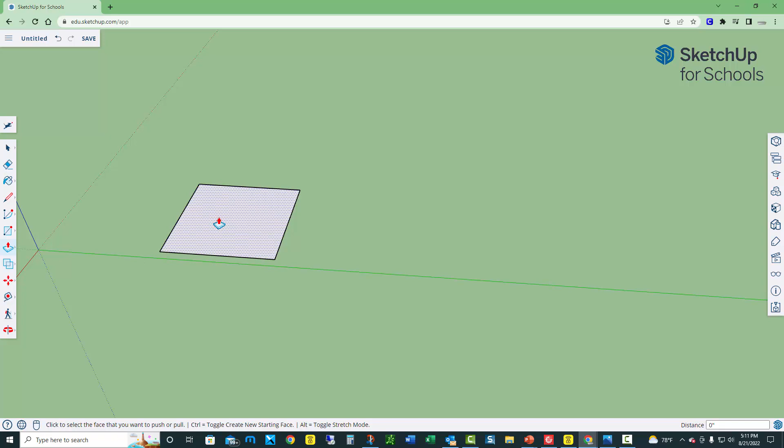So we'll go to the push-pull tool. This is the push-pull tool right here. We'll click on it, select it, and hover over the square. We will first click the square and start raising it up.

While we're raising the square up, if you notice in the bottom right hand corner, it has a distance of 21 1/8 inch. We want to make that 4 inches. To make it 4 inches, you notice it's still highlighted. While it's still highlighted, I would type in 4 on my keyboard,

Shift, and the quotation marks, Enter. That makes my roof 4 inches.

The next step, we would use the line tool to find the midpoint, and then we're going to create a ridge. To do that, we'll go find the line tool. It's over here, it looks like a pencil.

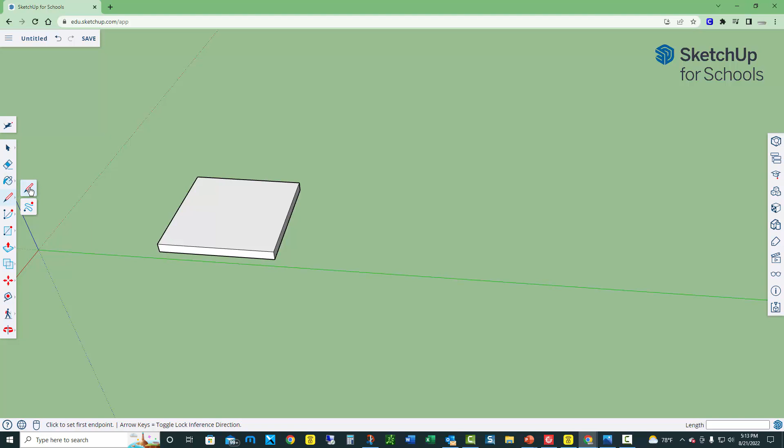The line tool. We'll click on the line tool. Again, it looks like a pencil. We'll click on that one. And now we're going to go to the edge and find the midpoint.

If I'm releasing my mouse now, you see the midpoint. You don't have to release your mouse, but there's the midpoint. Now I'm going to click once and drag up over.

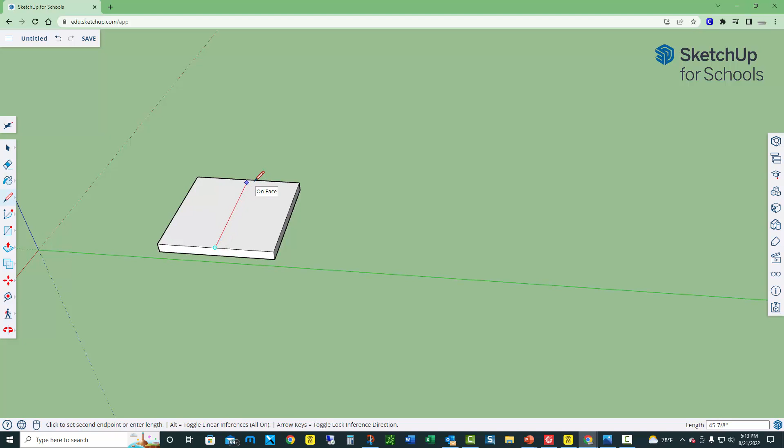And you notice the inference line. I'm looking for the other midpoint. Once I reach the edge and get the other midpoint, I will release my mouse. Now that I have the midpoint, the ridge, that's where the ridge is going to be, top of the ridge.

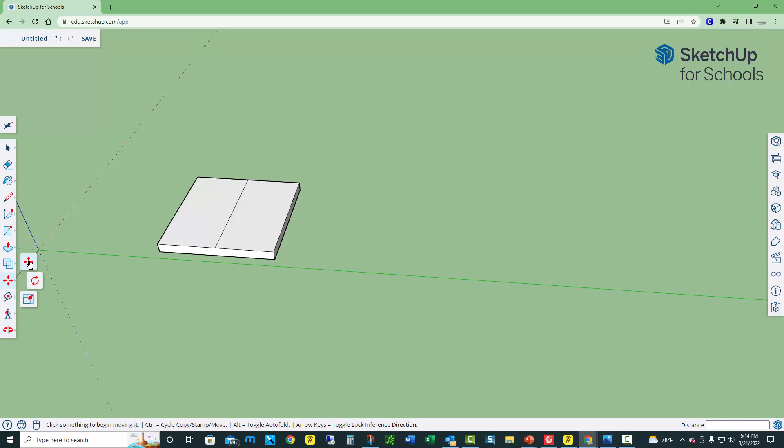Now I will use the move tool. I will click on the move tool. That's the move tool right there. Click it. Now I'm on the edge right there.

Once I'm on the edge, I will raise the roof. Click once to raise it. And if you notice, you see that dotted line, black dotted line. I'm looking for the blue solid line, see, on the blue axis. Once it's on the blue axis, I can let go.

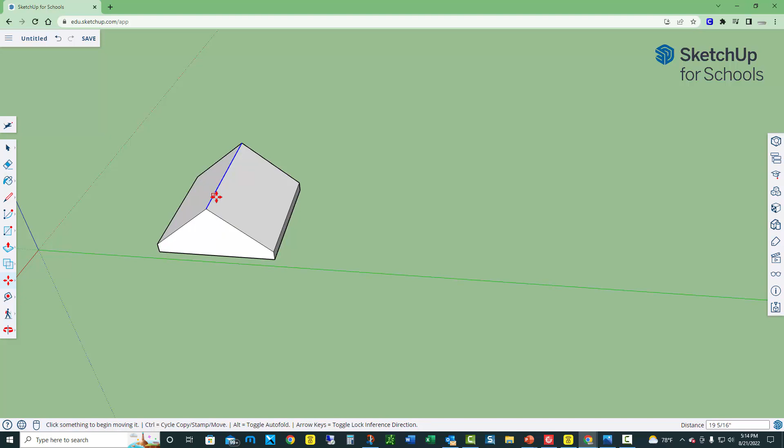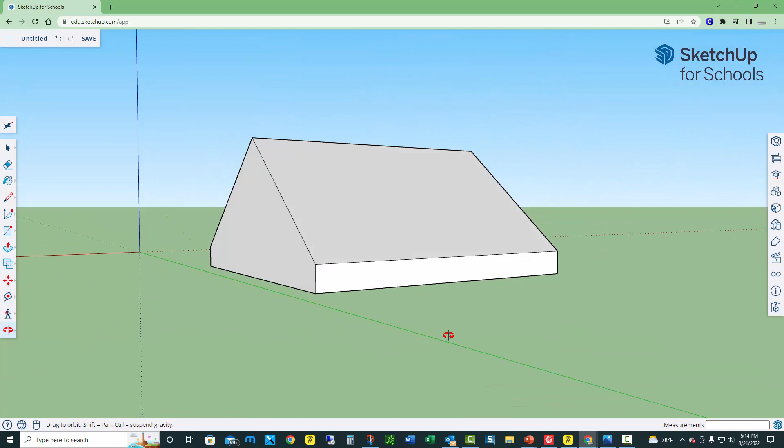So if I rotate it around, it's on the blue axis. But I can also raise this roof 12, 20 inches, depends on what I want. I can pick and choose. But for this project, we will raise it 12 inches.

So I'm going to click Control Z to undo what I just did. So anytime you find that you made a mistake, you can click Control Z, or you can click the undo arrow up there. I will click Control Z. That allows me to start over.

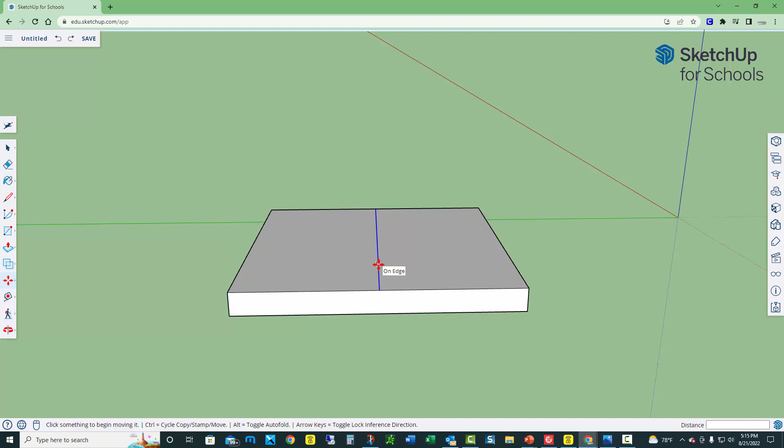Use the move tool. Find on the edge now. I will raise it up. There's the blue, on the blue axis.

Once I release it, I will type 12, Shift, quotation. I can do 12 inches or I can do 1 feet. So 1 feet would be 1 apostrophe. You have that choice and it'll be the same thing.

Then I'm going to click, so 12, quotation, enter, and it raised it 12 inches.

The next thing we would do is to group this roof. To group it, the reason why we're going to group it, we will group it so it would function as one complete unit.

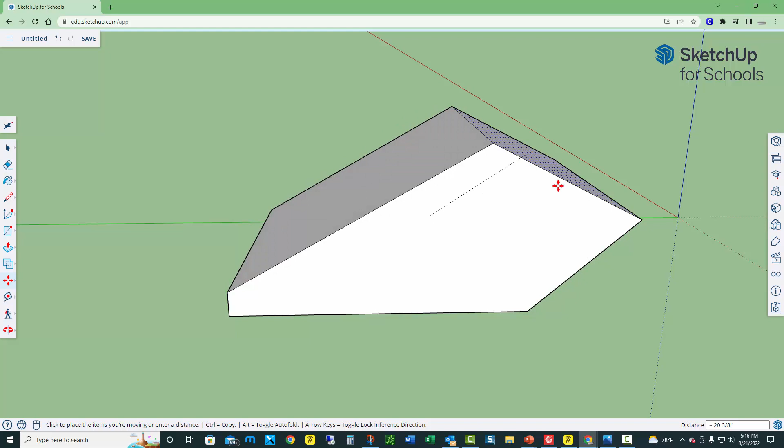If I don't group it, and just look at this, I'm using this move tool here. If I move it, you notice it will not move together. So I'm going to do Control Z to put it back in the form that I want.

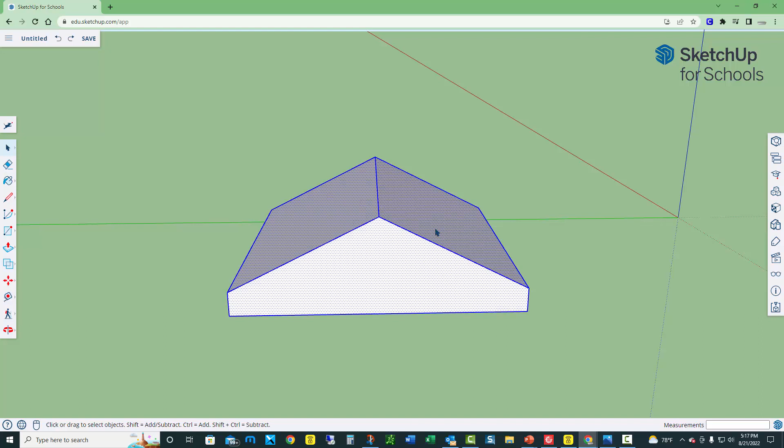And then I'm going to use the select tool right there, the arrow there, select tool, and I will click it 3 times. 1, 2, 3. If you notice now, all of the geometric sizes are highlighted.

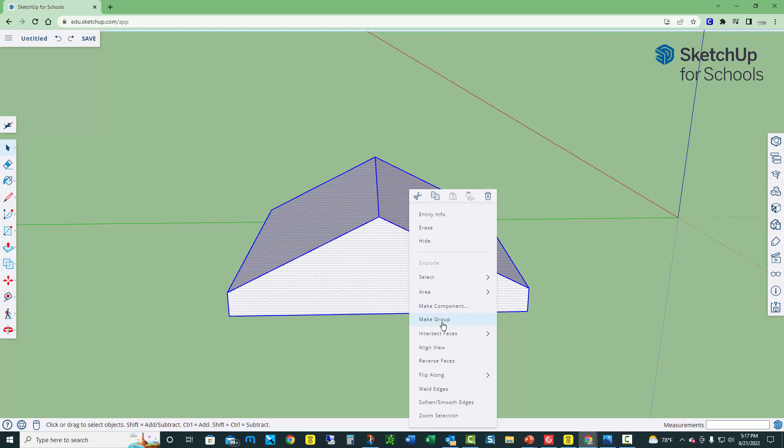On this box, the roof, I will right click on it and I will click Make Group. We will be using Make Component later, and Make Group, you would use that button if you only plan to use it one time. So we will only have one roof. Later on, we'll go into more details about Make Components. So for right now, we'll just click Make Group.

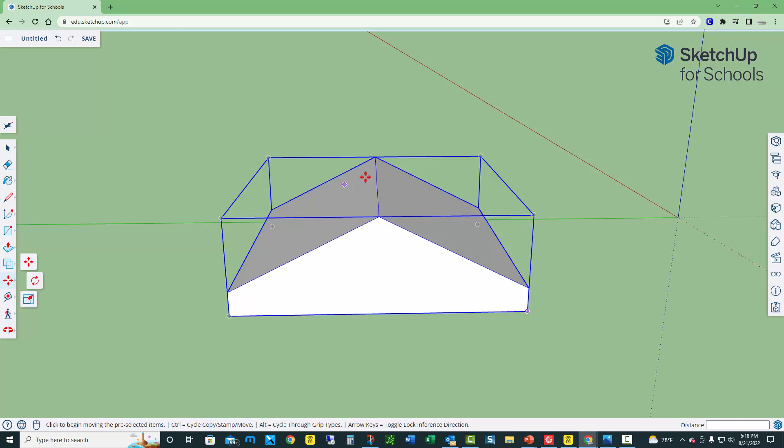If you notice, everything is in this little box right here. So now if I use the move tool, remember before when I use the move tool, it pulled my roof all out of shape. So now when I click on the move tool and I move it around, it's operating as one unit.

So now we're going to, the last thing we're going to do in this part of the video is we're going to raise it up on the blue axis. I'll release it, and we're going to raise the roof 8 feet. So that'd be 8 apostrophe. If you look at the bottom right hand corner where you see distance, and click enter on the keyboard.

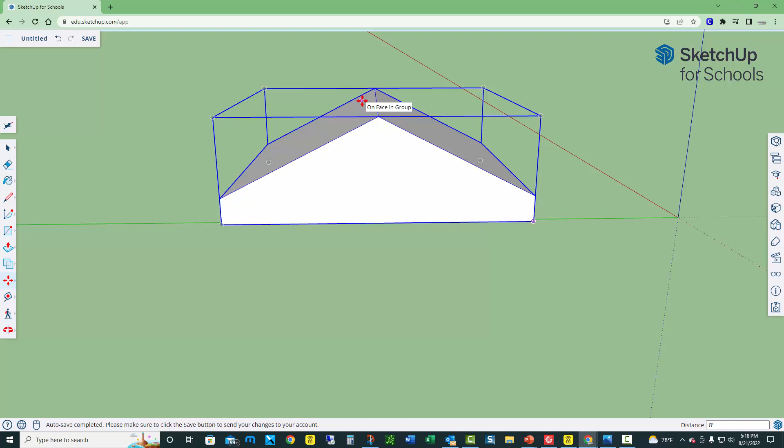It didn't disappear, it just raised above out of my view area. So if I zoom out, you will see the roof is raised up. So I'm zooming out. So it just raised it up 8 feet.

So that's how you make a roof. We made the roof, we raised it, initially we raised it 4 inches. Then we gave it a ridge of 12 inches. We used the midpoint tool to find that. We used the line tool to find the midpoint. Then we clicked it 3 times to make it a group.

In the next video, we'll talk about components and copying pillars.